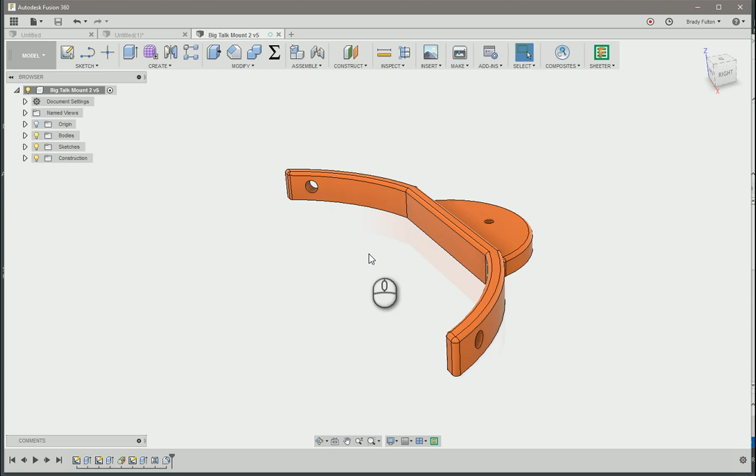Okay, so this is still a fixed mount for a Big Talk, which is a switch, and it doesn't come with any actual inserts or mounting screws whatsoever. So the switch just kind of goes around the case of it, and the holes on each side are for blind rivets. We'll drill some blind holes and put pop rivets in them to hold it, and then you can put this onto a flexible gooseneck mount or something like that.

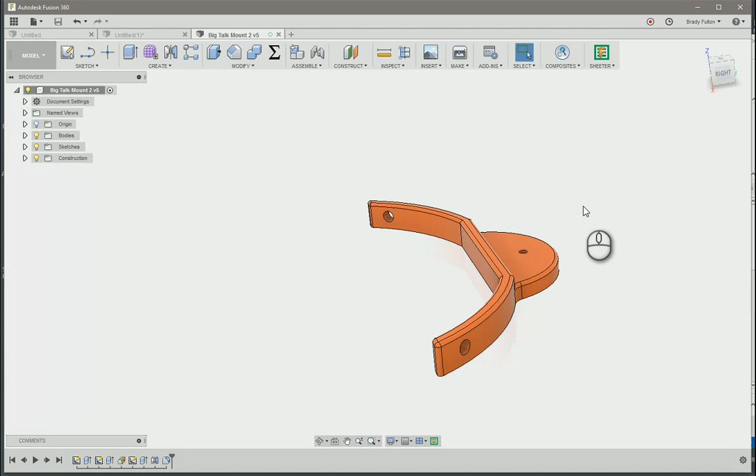But in keeping with the ATMakers motto of making it as easy as possible to mount, we also want to do a version of this with a 1/4 T-nut, which is very common for tripod mounts. One way to do that is to create a plug from an existing one. Bill said this is the one that works well, so we're just going to make a plug out of this existing component, and then stick it into ours.

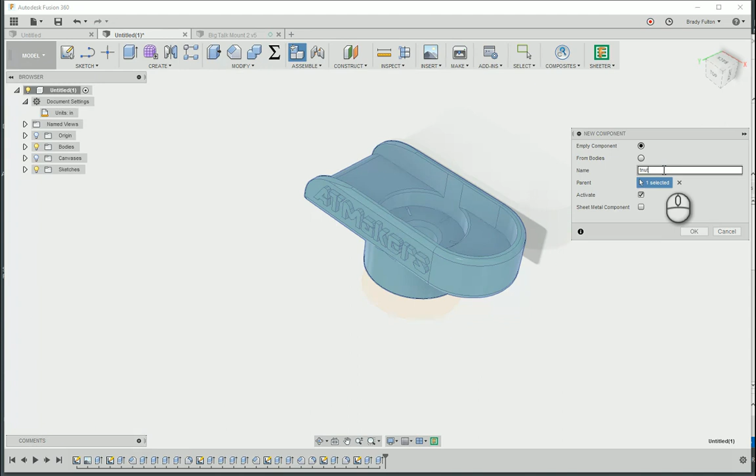So how I do that is I create a new component. I'm just going to call this T-nut plug, and create a new sketch. Let's actually end that. Let's create an offset plane from here.

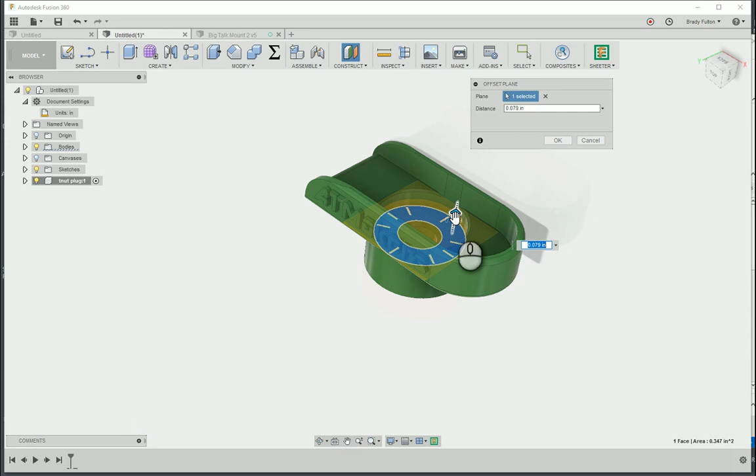We'll come up. I'm going to measure my T-nut and see... about 0.05 inches. So I'm going to go 0.079 inch, drop it there.

And now we can create a sketch on that offset, and you'll see why we did that. We'll project. All we'll project is this outside ring. Go OK, and then we're going to extrude that, and we're going to extrude it to object.

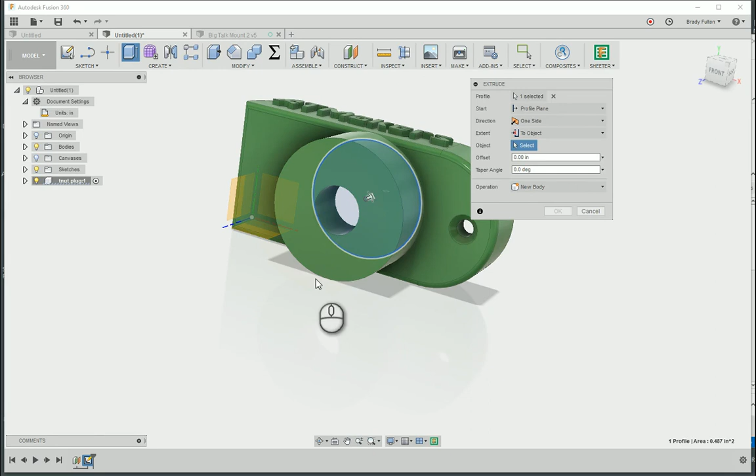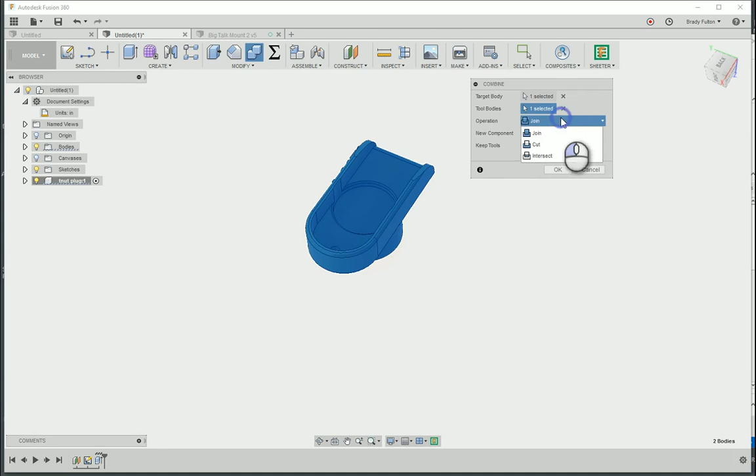We're going to go to the base here, and we're going to do new body. So now what we have here, if we turn off the bodies, we can see we just have this blank plug. That doesn't do much for us, but if we use this awesome command, combine, we can do our target body, and our tool body is going to be the existing component, and we are going to cut, and we're going to keep our tool, and go OK.

Now if we turn our body off, we have this fancy plug which we can use to modify our own components. So what we're going to do here is go ahead and save a copy as. That's fine. Save.

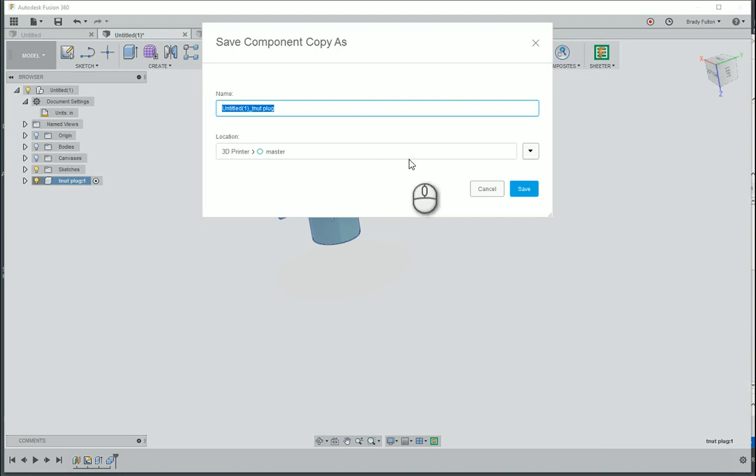And we'll go back to our mount. If we open up our browser tree here, do a little refresh - this is one I had done yesterday just to test the process. Where'd it go? There it is. So we'll just right click on that in our recent data panel, and we will insert into current design.

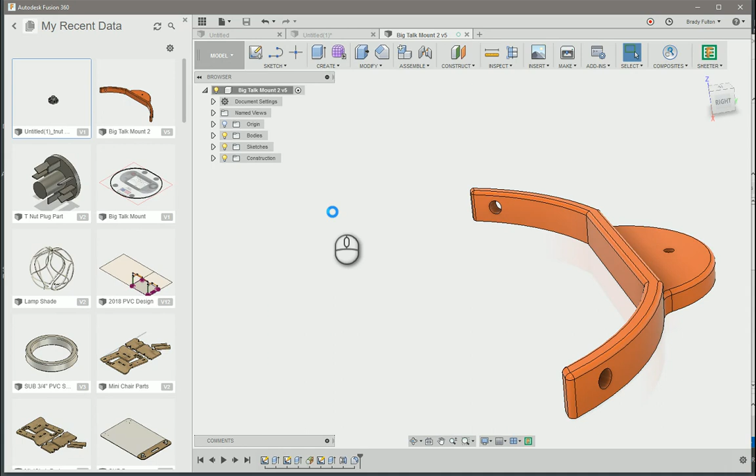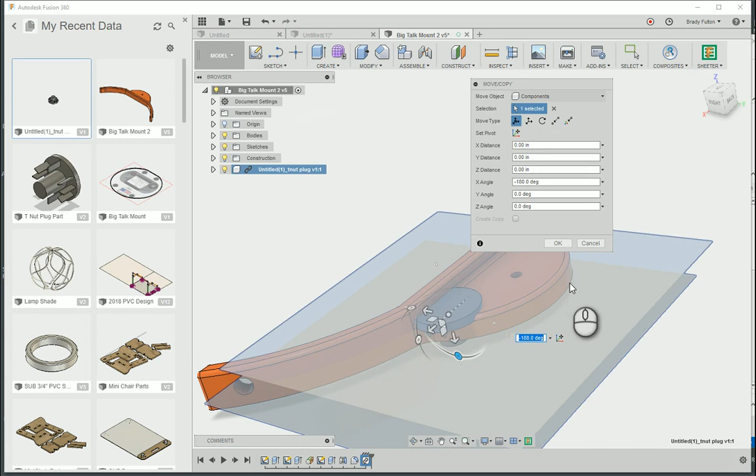We'll ignore that call. Let's see here. So now you got this guy going on. We definitely want to rotate it 180 in that direction, and let's see here. I'm just going to throw it off over here and leave it and say OK.

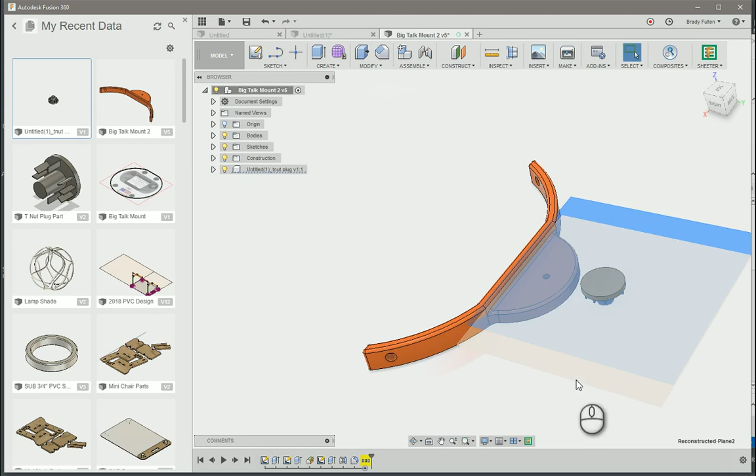So right now it's linked. That's fine, but I want to break this link. That's going to allow me to... I'm going to click on these. This is the offset plane I created. Just hit V for view. There's another one that's activated. V just turns off the view of it.

Now I'm going to create a joint between this guy and that. That's going to line them up nicely. Let's see that. And now we'll go ahead and hit OK.

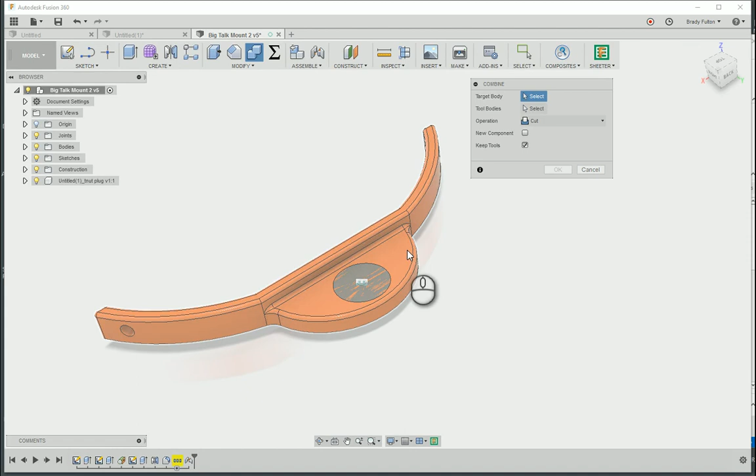Now we'll do our combine feature again. Close this, it'll pop back up. Target body is going to be now our new mount. Our tool body is going to be the plug. And we're going to hit cut, keep tool. We'll actually turn that off because I don't need to keep it after this.

So there we have it. That is our new T-nut capable Big Talk fixed mount. So we'll put this up on Thingiverse and maybe on AT Makers as well. And yeah, hope this taught you something. Have a great day.